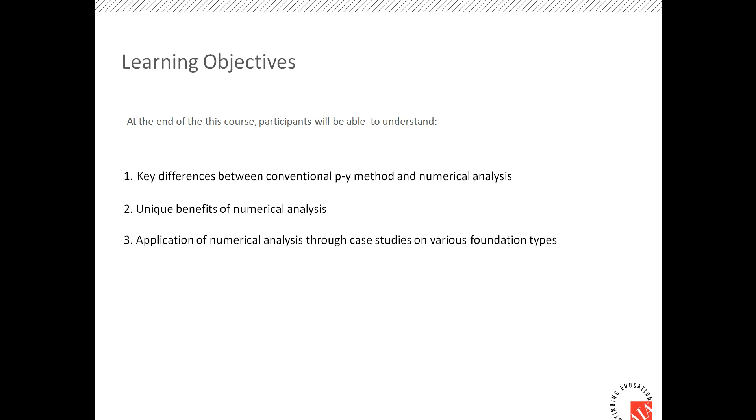Then the unique benefits of numerical analysis, as I alluded to previously, and then the application of numerical analysis through case studies on various foundation types. We actually have a case study submitted to us by one of our clients today from Langen, and we're very excited to share it near the end of this session.

Here's today's table of contents, the outline of the presentation. First is the background of foundations in general. Then we'll go over foundation design methods for single as well as group piles, and then pile raft foundations - the three main types of pile foundations you'll be working with. Then numerical analysis for pile foundations, a case study for a tower in Dubai, and last, a couple of numerical modeling demonstrations, one with SoilWorks and one with GTS, to conclude the session.

So first, let's talk about the background of foundations. We'll give you an introduction to pile analysis, the types of foundations or piles that are available, and also the load resistance of deep foundations.

As far as foundations, there are two main types. There's shallow foundations for smaller structures, usually smaller residential structures, warehouses, anything built within a firm foundation with a relatively small superstructure. Then we have deep foundations for high-rise buildings, large structures, or structures built in soils that have a looser or less resilient resisting force.

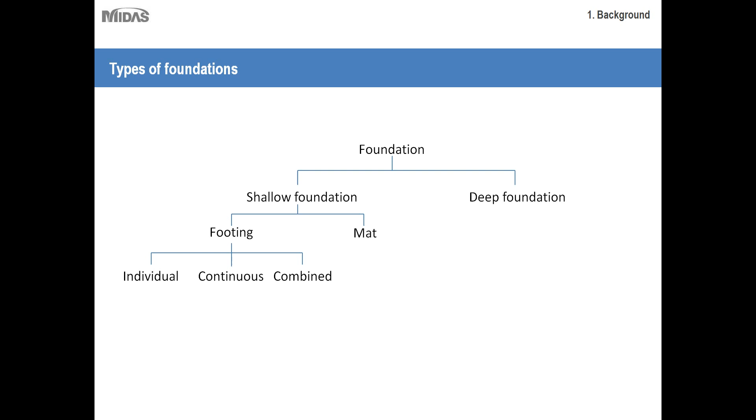Within shallow foundations, we have footing and mat foundations. Just two weeks from now, I'll go more into detail about shallow foundations as well as the different design methodologies used for them. These are all things you can look forward to in session 3, going into detail about these different types of shallow foundations.

But today's session will focus on deep foundations. Here we have three types: pile foundations, which will be the focus of today's course, then pier foundations, also known as drilled shafts, and then caissons. So once again, the focus will be deep foundations, and in particular piles, because these are the most commonly used.

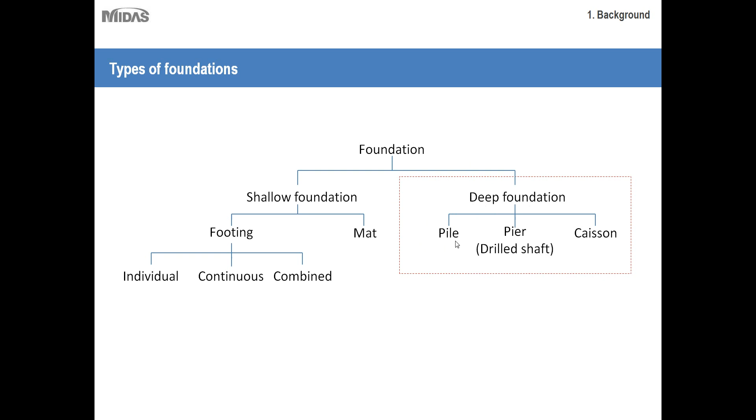As far as an introduction to pile analysis, I want to share a quote from Professor Braja Das, one of the leaders in pile foundation analysis. A quote that's really important to understand when doing pile analysis: although numerous investigations, both theoretical and experimental, have been conducted in the past to predict the behavior and load-bearing capacity of piles, the mechanisms are not yet fully understood and may never be.

Keep in mind that the understanding of pile foundations is always in a state of getting better. There are professors still working on ways to improve upon the methodologies we're currently using. However, the design of pile foundations has many variables to take into account. Structurally speaking, piles are not very complex structures, but their interaction with the soil around them leads to so many uncertainties that behavior is almost always unknown.

Something we discussed previously was how soil behavior is nonlinear, which makes it difficult to predict, and it becomes increasingly difficult to predict for deep pile foundations. Each case can be an independent case, and there are still complexities in interaction that engineers are still looking after, and researchers are still going on with pile analysis and pile foundations.

Something that's really great about these courses is that we'll talk about the latest numerical modeling techniques used by engineers to handle pile foundation analysis. Even though there are still variables that are yet unsolved, numerical analysis in particular helps us do our analysis with much more accuracy and much more confidence than previously.

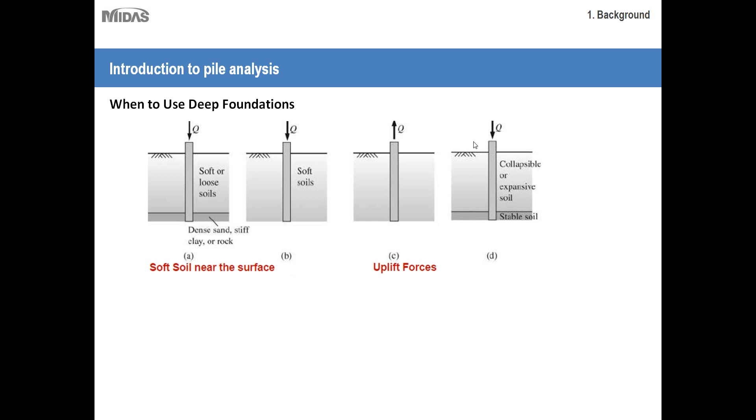Also, if you have large uplift forces, the same goes for collapsible or expansive soil underneath the surface. If there's a significant amount of uplift forces, pile foundations tend to stabilize the structure much more efficiently than a shallow foundation. Whenever soil is particularly weak or expansive, pile foundations can make the structure much more stable than a shallow foundation.

Also, if you have a significant amount of lateral loading, pile foundations are very useful in this respect. The deeper the foundation goes, the more resistance it can provide towards lateral loading, whereas a shallow foundation with significant lateral load would cause the foundation to fail.

Then also, if you have large tilting risks, so loads applied at an angle, such as a combination of lateral loads and axial loads, pile foundations can more readily resist that sort of force.

Then also scour effects. For example, if you have a bridge foundation built in a river, over time you have a certain amount of scour. If the water is going downstream and there's a significant amount of soil buildup upon the foundation, shallow foundations would not be able to resist that effect as efficiently as a pile foundation.

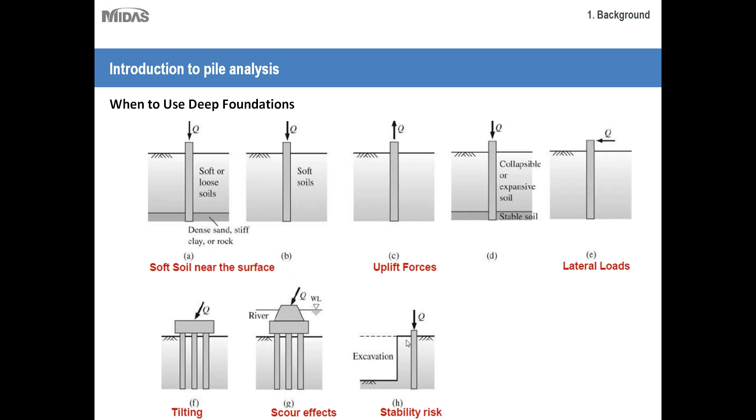And then if you have a stability risk with a foundation near an excavation or a slope and want to secure that—for example, if there's adjacent structures or a neighboring slope—pile foundations provide much more support and safety. A shallow foundation located close to an adjacent structure or excavation is more at risk to fail.

Okay, then also, this is another case I'll be talking about in detail today: particularly heavy load. If you're working on a large structure, say a high-rise building or one that experiences significant loading, maybe a large industrial plant, it typically requires what's called a pile raft foundation.

The pile raft foundation is a combination of a group of piles and a large concrete slab that distributes the weight accordingly. This is particularly useful for larger scale projects, and in particular for numerical modeling, pile raft foundations are done using that method—we'll discuss that in much greater detail later in this presentation.

So these are just the main project types that would warrant a pile foundation to be used and designed. I'm sure as geotech engineers you're already familiar with all of these, but it's a good review for those of you who are new to the field.

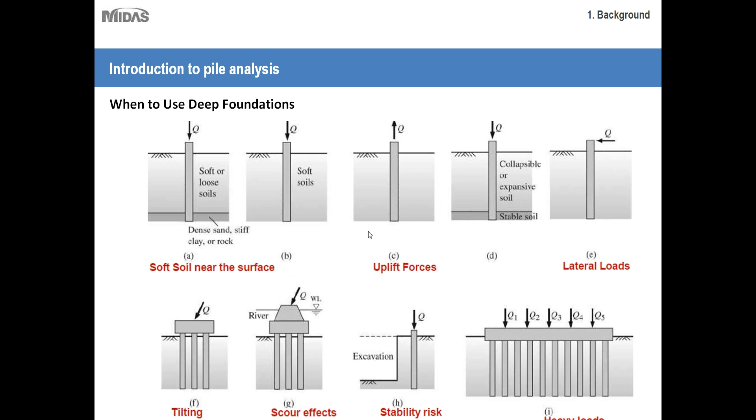Okay, so now let's talk about deep foundations. What are the different types of deep foundations? Based on the material, we have steel piles, concrete piles, as well as timber piles. Concrete piles in particular are the most commonly used at the moment.

Now, methods of installation can vary: we have driven piles, bored piles, and screwed piles. Also, regarding effect of installation, as I mentioned in the terminology, we have displacement, small displacement, and non-displacement piles. These are the classifications of the different types of deep foundation piles. In the interest of time, I won't go into too much detail, but just keep in mind these are the options available to you.

Now let's discuss the load resistance of deep foundations. In order to understand why deep foundations are preferred at the aforementioned conditions, we must understand the load transfer mechanism of the pile.

So the pile can be designed to be a shaft or frictional pile without any bearing resistance, or on the other hand, a fully end-bearing pile, or a combination of forces. It depends mainly on the soil conditions, but also on the pile itself, the size of the pile, the length of the pile, and partly on the load as well.

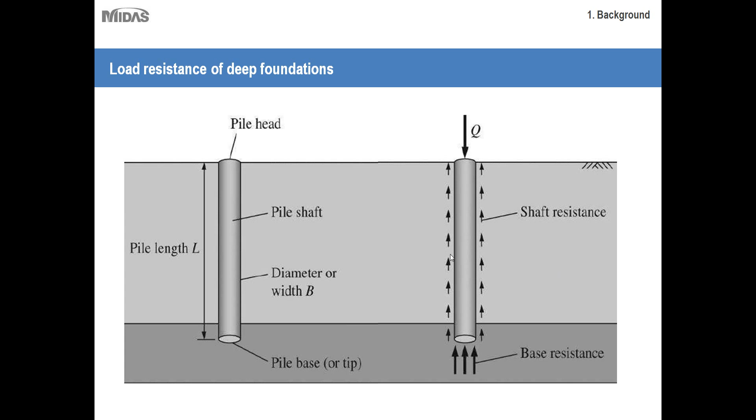So just keep in mind that these two main things are the base resistance as well as the shaft resistance. These are the two main forces that account for the resistance or stability of a particular pile, in addition to obviously your soil conditions.

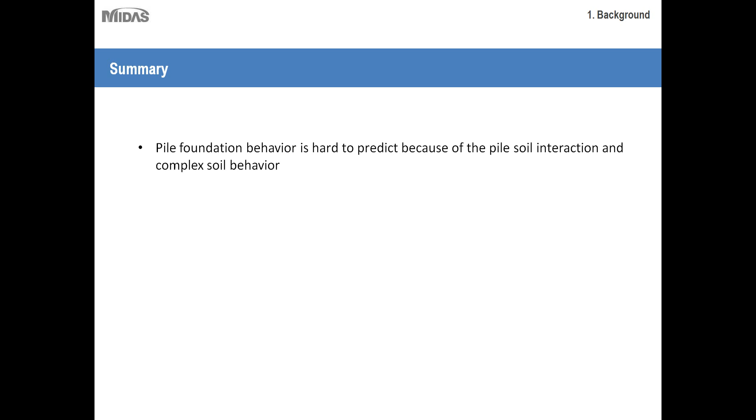Okay, so let's have a brief summary of what we just went over. Pile foundation behavior is hard to predict because of the pile-soil interaction. We'll discuss this in detail, soil structure interaction, how that comes into play, I believe in the next section. This is one of the complexities that makes it difficult to predict pile behavior. In order to really accurately predict it, soil structure interaction needs to be taken into account.

Also, unstable soil strata needs deep foundation to safely carry load to harder or more stable layers. So typically, as far as soil strata is concerned, your soft or weaker soil layers are located near the top, and your stronger, firmer soil layers or weathered rock layers are located near the bottom. So essentially what a pile foundation does is allow you to transmit the forces or weight of your structure past the soft soils and down to the hard soils where it's more resilient or stable. That's one of the key strengths of pile foundations, that you can drill down, or transmit those forces down to a more stable strata.

Okay, so structures exerting loads like high lateral, tilting, or heavy vertical loads, or structures near excavation, are site risks that can compromise stability and require deep foundations. For example, if you have any large-scale loads that include lateral loading or tilting, your pile foundations or deep foundations would be able to resist that much more efficiently and safely than a shallow foundation.

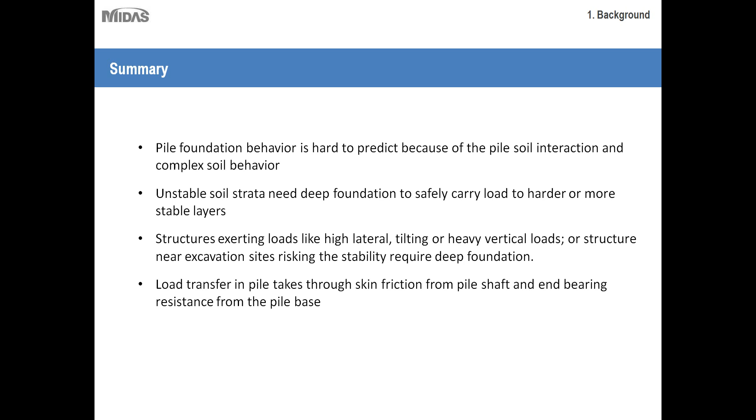So load transfer in the pile takes place through skin friction from the pile shaft and end bearing resistance from the pile base. So those two main factors come into account when you're taking a look at load transfer: through the skin friction and then through the pile tip at the bottom.

Piles could be designed as skin friction, end bearing, or a combination of both, depending upon soil conditions, the method of installation, pile material, and external loads. So several variables need to be taken into account when designing them: skin friction, end bearing capacity, soil conditions, and your method of installation. These are the main points to take into account from this particular section.

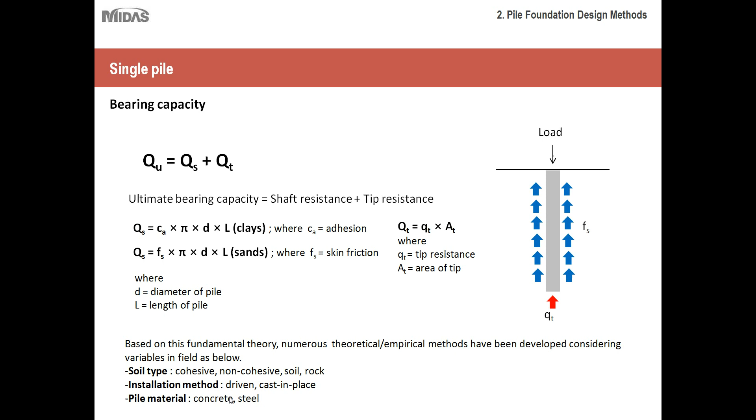Typically concrete is the material of choice. It provides a relatively high shaft resistance, whereas steel, as you can imagine, is much smoother. So the shaft resistance would be significantly less.

Next, we need to determine the settlements that comprise these values. So S sub T, total settlement, equals the elastic settlement plus the shaft settlement plus the tip settlement. When you're doing your analysis or design, make sure that you take into account all three settlement types to determine your total settlement.

The tip settlement is the settlement that occurs at the very base of your pile near the bottom. Shaft settlement is the settlement that occurs on the sides of your pile. The skin friction will resist against the shaft settlement, but there'll still be a certain amount due to shaft settlement. And then also elastic settlement.

Whenever you apply any compression load upon your pile, your pile will compress, and there'll be a certain amount of settlement that results from that as well. A combination of all three settlements equals the total settlement, which is ultimately what you'll be looking for in your final design.

Okay, now let's talk about lateral behavior of the pile. Whenever you have any lateral load being applied to your pile, there's a certain type of analysis you need to do. First, let's discuss Broms' method.

This factor beta is applied to determining the lateral behavior of the pile, and it's based on this equation here. Certain variables include the stiffness of the pile section, the coefficient of horizontal subgrade reaction, and also the width and diameter of the pile.

The coefficient of horizontal subgrade reaction is typically determined through extensive lab testing. So typically you have your soil samples, and your engineers or lab workers do significant amounts of testing in the lab.

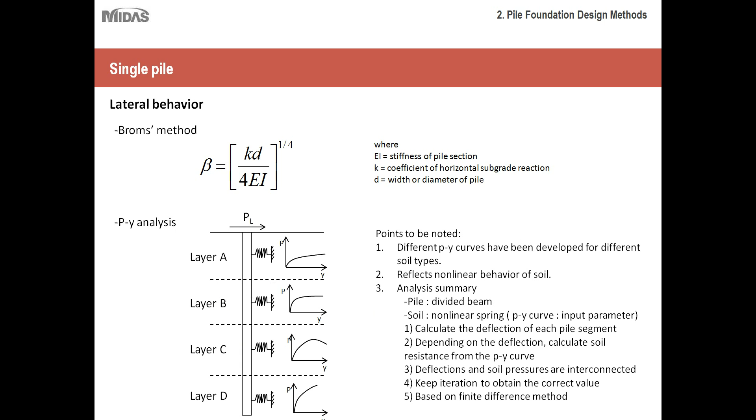And then once again, you have to keep the iterations to obtain the correct values. So PY analysis is an iterative process, but through numerical modeling programs that are out there, it does the iterations for you. So the main things you need to be concerned about are just inputting the proper parameters for your soil layers as well as your pile. And then, as I said, it is based on the finite difference method.

Okay, so let's now compare directly PY analysis versus numerical analysis. First, soil behavior: PY analysis predicts soil behavior primarily through the PY curve, whereas numerical analysis relies more upon constitutive models, such as the Mohr-Coulomb model.

Now, for the pile elements, they're modeled as beams in PY analysis, so they're modeled as just these line elements. Whereas with numerical analysis, you have the option of using solid elements as well as beam elements or line elements. The modeling for PY analysis is a beam plus a nonlinear spring, whereas with numerical analysis, you can create a 2D or 3D structural model.

So for those of you who have experience using both analysis methods, I'm sure you already know that PY analysis is much simpler, much easier to use because there's less variables to take into account. That being said, there are more assumptions being made because PY analysis is more conservative. Whereas with numerical analysis, there are many more variables to be taken into account. The modeling takes longer, but the results are much more accurate because more variables are used in the calculations, and there are less assumptions being made.

Soil structure interaction is based purely, once again, on the PY curve, whereas with numerical analysis, you have interface as well as embedded elements that the program uses. So you define these elements and the program uses what you defined to determine the interface, the way your soil interacts with the pile elements. We'll discuss this in greater detail later on. And then the upper structure, you can partially model it.

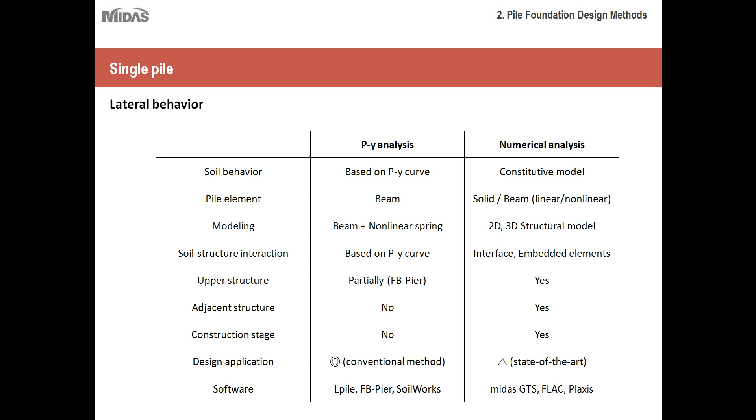As far as the software available in the market nowadays, LPILE, FB-Pier, or SoilWorks all handle PY analysis very well. As far as numerical analysis or finite element modeling, Midas GTS, FLAC, and Plaxis are among the top programs used for those types of projects.

The design itself will involve determining how to optimize the best design for the number of piles, selecting the best organization or configuration of your piles, as well as how many piles are being used - the spacing, the layout within the foundations. Typically you'll have several different layouts that you want to try, and you'll run the analysis for each and see which one works best for your project needs.

As far as the pile cap, it mainly serves to distribute the load coming from the top properly to the different piles and to connect these piles to the superstructure. So that's pretty straightforward. As far as the way your forces will be distributed, they'll be pressed upon the pile cap, the pile cap will distribute them to the piles, and the piles will transfer the loads to the soil.

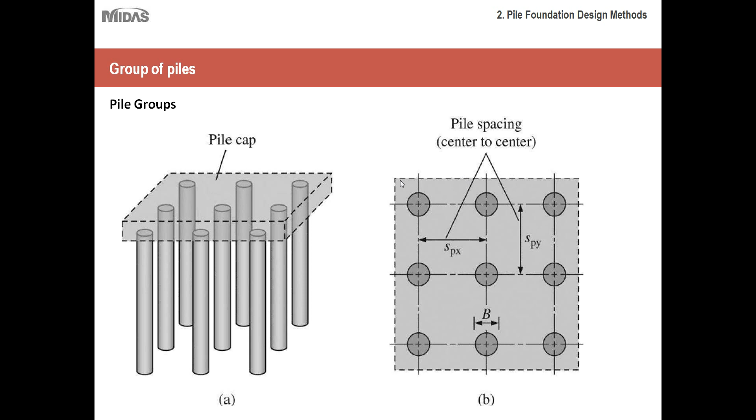I'm sure you've all seen this overhead view before. Your center to center spacing of your piles is outlined as such.

Some important concepts to remember when you're designing pile groups: the ultimate capacity of piles may not be equal to the number of piles multiplied by the capacity of a single pile. So you can't just do the analysis for one pile and then multiply it by how many other piles you put in the group and get your total capacity. It doesn't really work that simply.

Also, the ratio of the pile group capacity to the total load capacity of the piles acting as single piles is called the group efficiency factor. This is another important thing to keep in mind when designing a group pile. The group efficiency factor is dependent on the number of pile rows and the number of piles per row, spacing, and the diameter of the piles in the group - so it depends on how your piles are spaced, as well as the size of the piles themselves.

Okay, so now let's discuss pile raft foundations, which, as I stated previously, are for larger scale structures or larger scale projects. Pile raft foundations provide an economical foundation option for circumstances where the performance of the raft alone does not satisfy the design requirements. Under these situations, the addition of a limited number of piles may improve the ultimate load capacity, the settlement and differential settlement performance, and the required thickness of the raft.

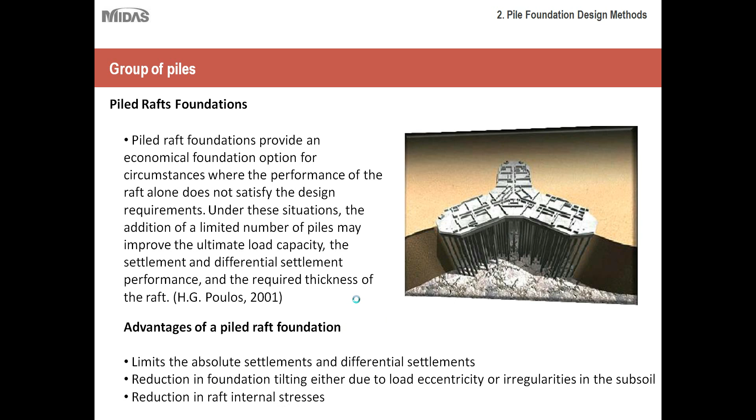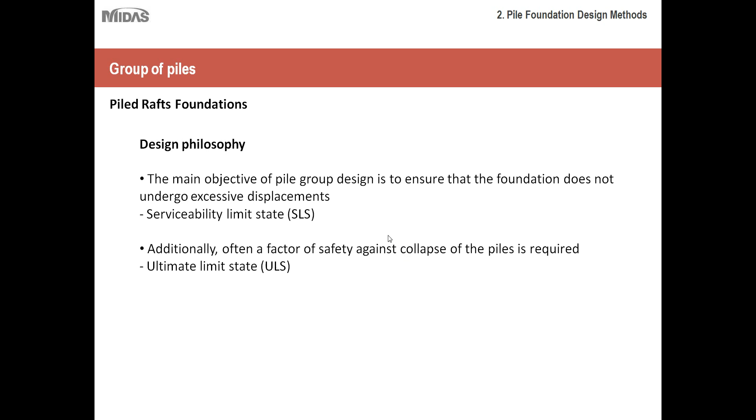Let's talk more about pile raft foundations, and in particular, the design philosophy behind them. The main objective of pile group design is to ensure the foundation doesn't undergo excessive displacements, also known as a serviceability limit state. There's a certain limit you don't want to pass as far as displacement. Additionally, often a factor of safety against collapse of a pile is required, also called the ultimate limit state. The real ultimate limit state must be determined by considering the interaction of foundation and superstructure.

For those who've worked or will work with pile raft foundations, you'll need to work closely with structural engineers. It's usually a back and forth: geotechnical engineers provide certain design considerations to the structural team, they run the analysis on their end with specifications they need to meet, and send results back to you. It's an iterative process between structural and geotech engineers to ensure all design goals are met.

Also, the ULS, or ultimate limit state, reverts to a displacement criterion determined by structural considerations. Once again, it's very much a team effort between geotech and structural engineers when pile raft foundations are designed.

Now for the bearing behavior of a pile raft. The behavior of a pile raft foundation is much more complex than single or even group pile foundations. You can do away with the PY curve approach through several iterations for a single pile or group of piles, but I think use of numerical analysis programs like MIDAS-GTS or Plaxis 3D is absolutely necessary. Here's the reason why.

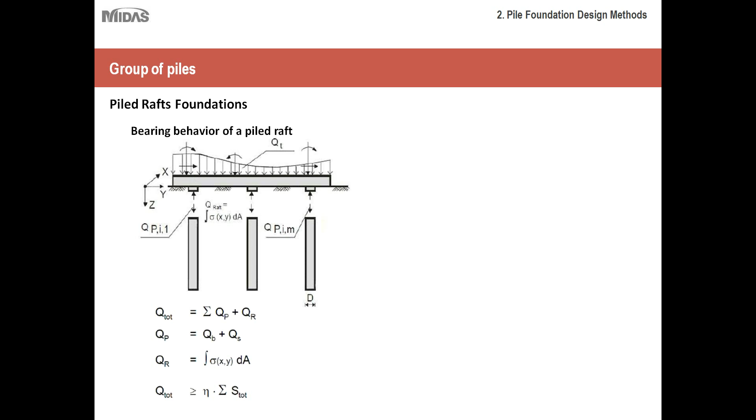These interactions are very critical in governing how the piled raft will behave or perform, and its ultimate bearing capacity at the end. Ultimately, the total bearing capacity of the piled raft will be the summation of the bearing capacity of the piles plus the bearing capacity of the raft.

Even though from the outside it looks very simple as far as how the design or structure works, there are all these variables that need to be taken into account in order to really design an optimized pile raft foundation.

As you can imagine, doing something like this by hand or by spreadsheet would take a very long period of time. It would be a very painstaking process. So that's just another advantage of numerical modeling programs in general.

So you have large-scale projects with these types of variables. Your main focus ultimately will be to design or create a model that simulates all of the input parameters that you have. For example, you need to make sure your soil properties are correct, the dimensions of your pile raft are correct, and that you have a configuration that works as a starting point.

From that point, you can run the analysis. You can see how close it gets to your ultimate bearing capacity or the limits that you set, and then you can go back and make adjustments to the design. So it's an iterative process with the structural engineers.

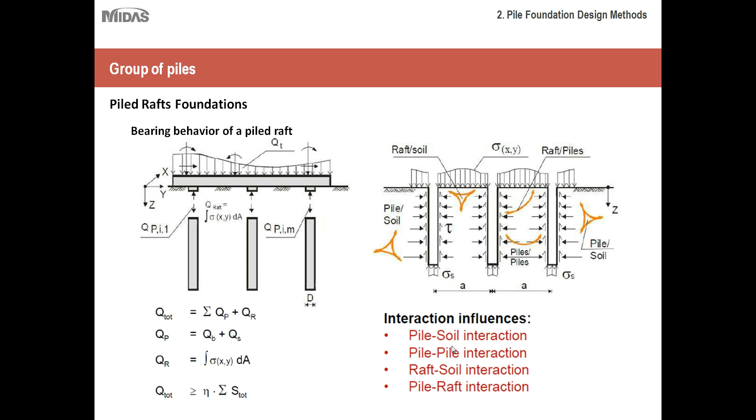But keep in mind that when you run the analysis on any numerical modeling program, these interactions are all being taken into account. That's why for a lot of large-scale projects such as pile rafts, the analysis can take quite a long time, maybe up to an hour on even the most high-end programs. That's why the analysis itself takes so long - it's because there are all these interactions that need to be taken into account and computed for.

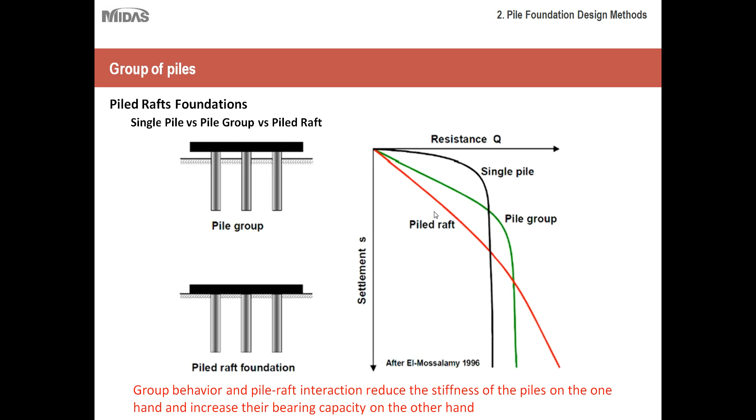Okay, so now let's talk about certain design requirements for the pile raft foundations. SLS, serviceability limit state, is a decisive criterion for the design of vertically loaded pile rafts. Also, the magnitude of absolute and differential settlements and tilting of buildings are therefore of special importance, especially for high-rise buildings.

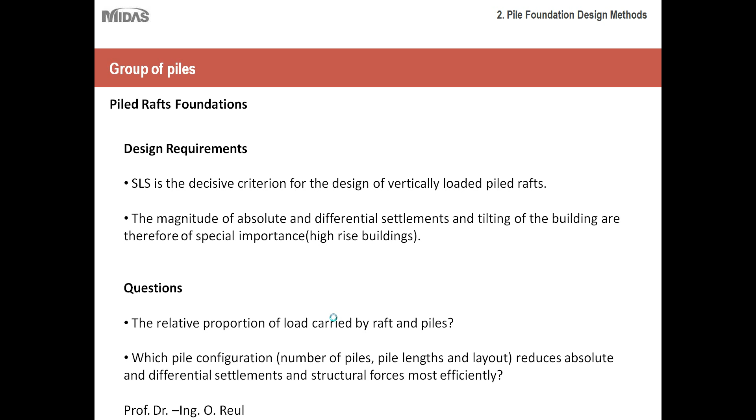And then numerical modeling requirements. For those of you who are or will be working with pile raft foundations, these are things you'll need to take into account whenever you're creating your model. You should keep in mind that the model should be able to consider the three-dimensional behavior of the pile raft foundation. This is key - you can't really model pile raft foundations in 2D.

As we stated previously, the inner and corner piles behave very differently, so in order to accurately capture the behavior of a pile raft foundation, it has to be done in full 3D. Also, you need to simulate the behavior of a single pile to check its reliability and adjust the applied parameters depending on the chosen pile type. That's another iterative process - determining the parameters of your single pile.

Also, the applied constitutive laws should be able to take these things into account: the nonlinear pile-soil behavior at the pile shaft and pile base, as well as the stress-strain behavior of the soil depending upon the applied stress path and strain level. This just goes back to your input parameters - you have to make sure that all of the data you put into the program is reliable and accurate. Naturally you'll have lab tests and field tests at your disposal to make sure these constitutive laws are met.

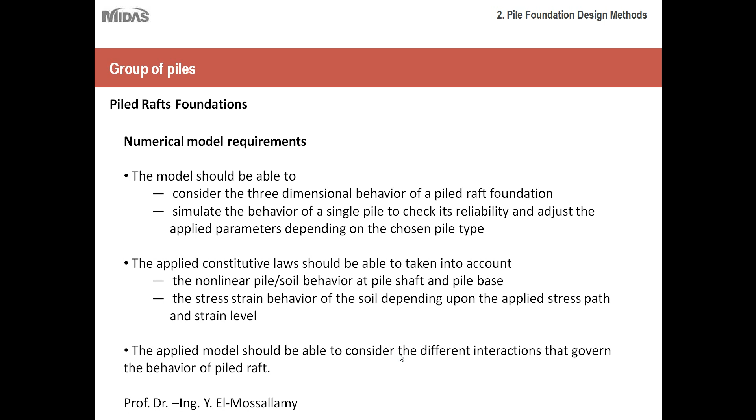And also the applied model should be able to consider the different interactions that govern the behavior of the piled raft. That goes down to modeling interface elements, making sure that all of your parameters accurately represent the behavior of your soil against your piles, as well as the piles against the raft. We'll talk about that in greater detail in the next section, but these are certain variables that are very important when doing your numerical model.

Okay, and then just the design process of pile raft foundation. As we discussed previously, it's a very iterative process. First you have your geotechnical tests, lab tests, field tests to determine the strength and characteristics of your soil. You'll also have pile tests to determine the strength characteristics of your piles. From that point, you'll create a numerical model on a software or geotechnical program. Once you create your model, you'll run the simulation to get your results.

Typically a parametric study - that's just another way of saying multiple case study - you'll have several different cases that you'll model and compare against each other, with different load combinations that you'll want to model. Then it'll go back to the model simulation. So it's this iterative process where you make adjustments to your model based on the results.

If the results that you have aren't optimal, you'll want to go back and change your model and see what your results are again. Once you create your model, there might be some calibration that needs to be done, which goes back to your model simulation, so rerunning the analysis after making changes. Once you're ready, you can submit a foundation design to your structural engineers to review.

As far as foundation design, the serviceability limit state and the ultimate limit state are two criteria that need to be brought to the forefront, which the structural engineers will be looking out for when they do their structural design. The structural engineers, using what you give them, will make certain design choices, but they may need to go back to you and ask you to make adjustments to your model to better fit what they have in mind. That's the second iterative process you're working with, going back and forth with the structural engineer.

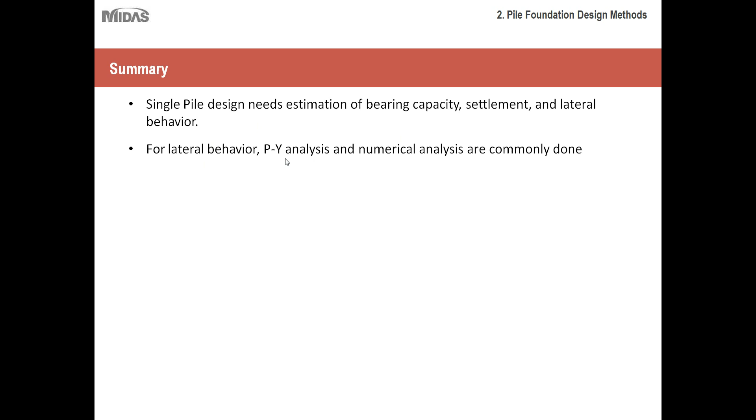Okay, in summary, I know it's a very long section, so let's review what we went over before the quiz. Single pile design needs the estimation of bearing capacity, settlement, and lateral behavior. For lateral behavior, PY analysis and numerical analysis are very commonly done. Numerical analysis has the advantage over PY analysis as it saves iterations and approximation.

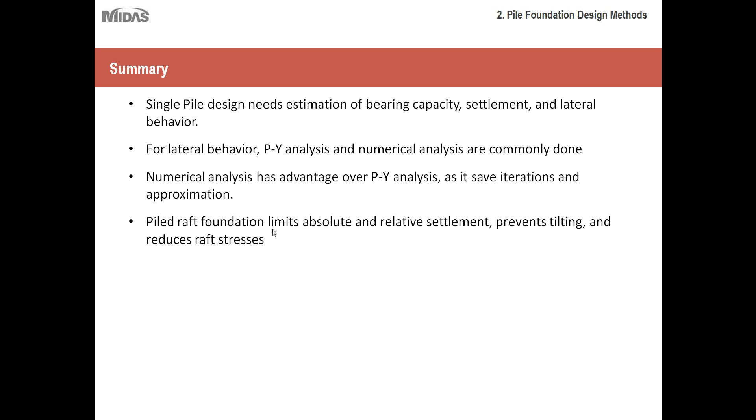Pile raft foundation limits absolute and relative settlement, prevents tilting, and reduces raft stresses. Those are key advantages of pile raft foundations. The pile raft system reduces the pile stiffness and increases the bearing capacity, thus preventing failure.

The governing criteria for the design of a pile raft is settlement, or the serviceability limit state. Pile raft foundation behavior involves pile-to-pile, soil-to-pile, raft-to-soil, and raft-to-pile interaction, making conventional analysis obsolete. There's really no way to approach pile raft foundation design or analysis with conventional methods; it has to be done through a finite element model, through a program. 3D numerical analysis must be done for pile raft foundation.

So these are the main key points to take from this section. I know we went over a lot of material quickly in the interest of time, so don't worry, I'll send everyone a copy of this PowerPoint at the conclusion of the session. Also, the numerical model must be calibrated with field data, and constitutive laws must reflect the interaction. That's pretty straightforward - you have to get your field test first before you create your numerical model.

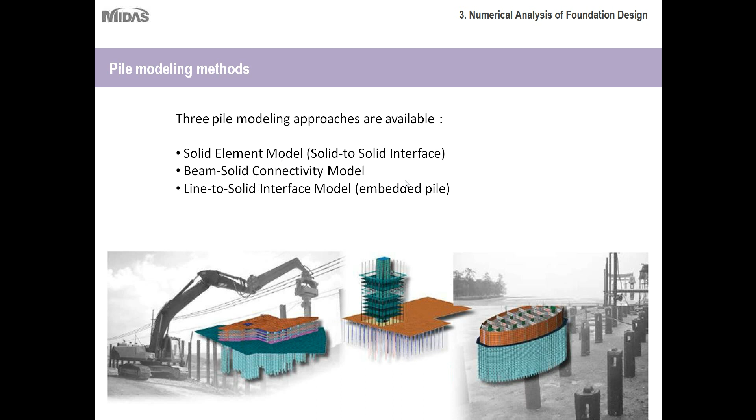Numerical analysis for foundation design. We'll go over different pile modeling methods, how to verify results, and things that need to be considered in numerical analysis. When it comes to numerical analysis or finite element modeling, there are three main approaches available: a solid element model, also known as a solid-to-solid interface; the beam-to-solid connectivity model; and a line-to-solid interface model, also known as the embedded pile. We'll go over each of these modeling types in detail.

First, let's talk about the solid element, or the solid-to-solid interface. Essentially, what you're doing when creating a solid-to-solid interface is you have a complete model that consists of all solid elements. As you can see, this pile consists of solid elements. The engineer has taken his pile, just a single pile, and divided or meshed it into a set of finite elements. He's done the same with the soil, which, when working with finite element analysis, you'll always mesh.

However, meshing your pile is optional. There are certain benefits and weaknesses when you choose to mesh your pile element as well. But keep in mind that in addition to your pile element being meshed, there is also a series of interface elements created along the surface to model your pile-to-soil behavior. So that's the first model, solid-to-solid interface, and the main thing to remember is that what makes it unique as far as modeling is that the pile element has been fully meshed.

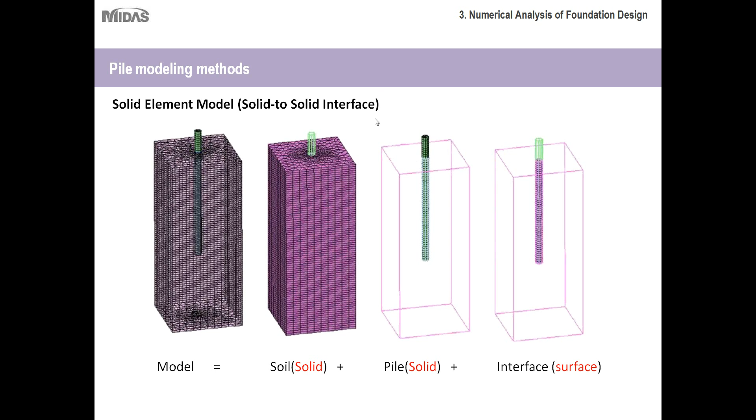So let's take a look at how this affects our analysis. Main points of attention for solid element models: the model definition and mesh generation can be elaborate for a large number of piles.

This is just another way of saying if you have a large-scale model with maybe a dozen piles, or up to 100 piles, then creating a mesh set for each individual pile might be cumbersome, a bit too much. Keep in mind that the more you mesh, or the larger amount of elements in your model, the longer it takes to analyze.

Even if you elect to mesh your piles, you'll get very highly accurate results, but the analysis could take a very long time, especially with a very large set of piles. So many elements in the model contribute to a very long computation time.

Also, pile forces and moments are not directly available in the post-processing. Even though finite element analysis, or creating 3D elements for your pile, is very good for displacements, all the nodes are just connected. Here's your interface element, and all your nodes are interconnected.

You can get very good displacements, but you can't get, for example, shear force, axial moments, axial forces, or moment diagrams for your pile. If that's something you need, keep in mind solid elements can't represent or be used to calculate that. That's one shortcoming of solid elements: you can't get your moment diagrams or axial shear diagrams for your piles.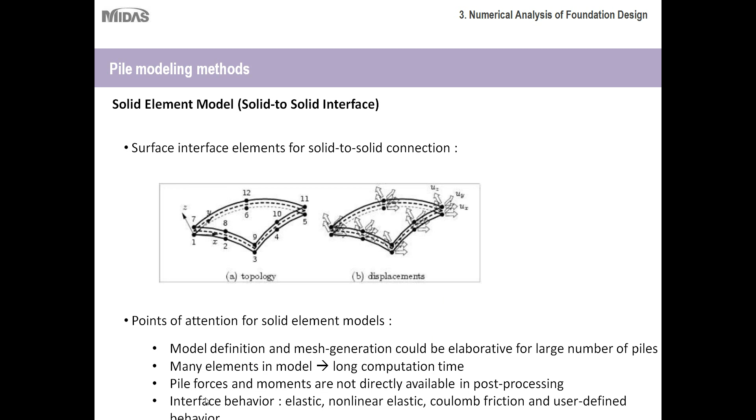Those are three different categories. In other words, when you create your model, you'll input your parameters for your soil and your pile, but then you also have a third category specifically for interface behavior. So it's important not to forget to define that behavior when creating your model.

Okay, so our next modeling type is called the beam solid connectivity model. As you can see, the soil is meshed once again, but this time the pile is represented by a beam element. So when you do this, you're telling the program that this beam element has certain material characteristics, for example a diameter, a length, etc.

But when the analysis is run, the program will model the pile as a beam element, for the sake of simplicity. Since the pile itself is symmetric and the properties are uniform throughout as far as geometry, it's very convenient to model this as a beam element.

Main things to remember: there's no interface elements for a beam to solid connectivity model, it's just a beam to solid connection. What happens here is your nodes are linked directly to your solid elements. As you can see, one of these represents, for example, a solid element, or the neighboring solid element to your pile.

These nodes will overlap, so the nodes will be shared between the solid elements and your beam element. That way, the displacement will be uniform. For example, if the soil shifts x number of inches, the same principle applies to the beam element - it will also shift x number of inches depending on its placement.

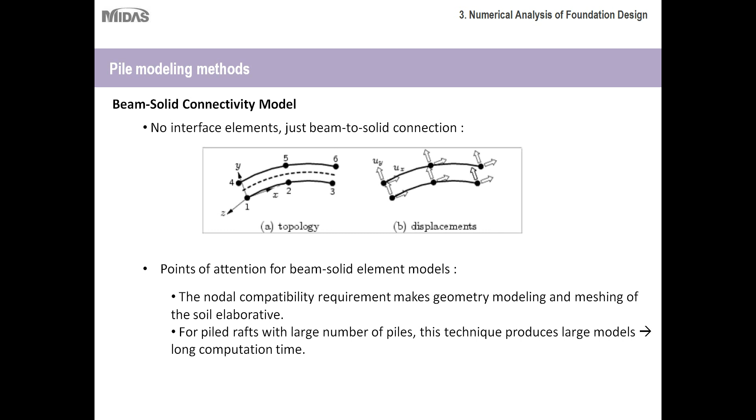So this is typically used for smaller group piles, for example bridge abutments - I've seen this method used a lot for bridge abutments. Whereas for large high-rise buildings or large structures with large pile raft foundations, this method is hardly ever used. In fact, I've never seen it used for a pile raft foundation, just because of the complexities of linking up all the nodes.

So the third model we'll talk about is the line to solid interface model. The main thing to remember is it uses a combination of the solid-to-element approaches of the previous two models to achieve something much more convenient for pile raft foundations in particular.

The pile is modeled with a special element called an embedded pile, represented by these red boxes. It has the property of a beam, allowing extraction of moment and bending forces, which is very key. In the previous beam-to-solid model, you could get axial forces and moment diagrams, but doing the interface was very difficult because of how you had to line up your nodes.

But with the line to solid interface model - I'll discuss it on the next slide - you don't have to line up your nodes at all; it's done automatically. And because part of the pile is modeled as a beam element, you're still able to get moment and shear diagrams. This interface element allows for soil-structure interaction, while the beam element still gives you those diagrams.

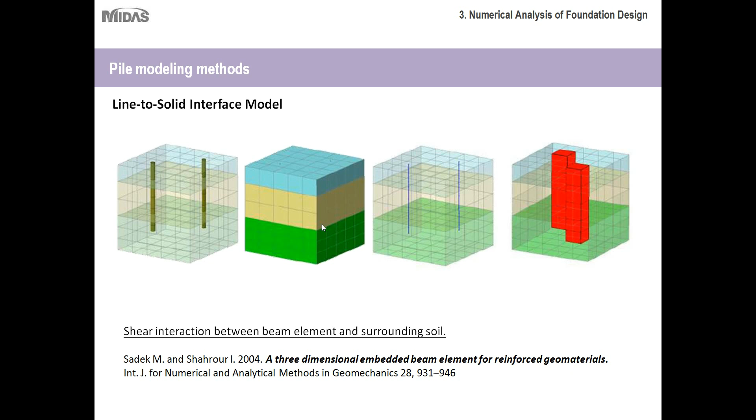So it's really a combination of this beam element plus these interface elements, which makes it a very versatile method to use, especially with pile raft foundations, as far as doing redesigns. Let me go to the next slide to give you a better idea.

So here we have the line to solid interface model, with a couple of characteristics. These square, or hexahedral, elements represent the solid elements of your soil, and these line elements, the beam elements, represent your pile. As you can see, you can directly embed the pile within these solid elements.

And pile and soil geometry can be specified independently - meaning you don't have to worry about directly interconnecting your pile and soil geometry; you can model them independently. The intersections of line and solid elements are calculated automatically, which is very, very key.

You actually don't have to model the intersections yourself. Just because of the way this method is set up, the program can automatically calculate those intersections. Which is very important, so if you go back and redesign or make changes to your model, you don't have to redo all the meshing or line up all the nodes. Technically they don't really line up, but the intersections are computed automatically for you, so you don't have to worry about those. It's all done for you.

Also, nonlinear friction slip properties for line-solid interface elements. Once again, when doing this model, you have to come prepared with your interface material parameters. The properties are for a line to solid interface, which I'll show you a detail of later on. Mesh refinement requirements for the soil are minimal - you don't even have to have a very highly refined or small mesh. You can get very accurate results with larger mesh sizes.

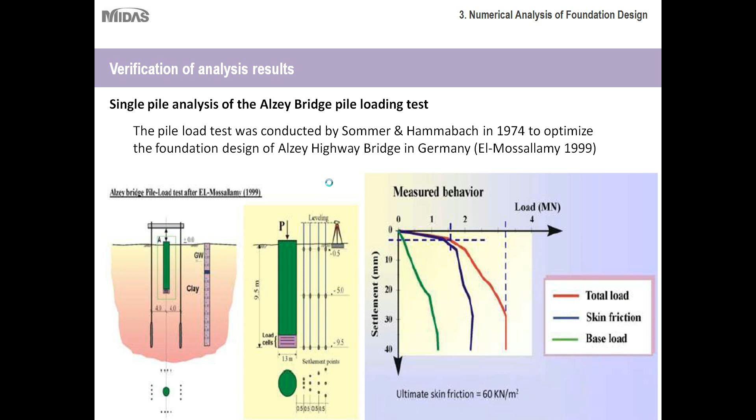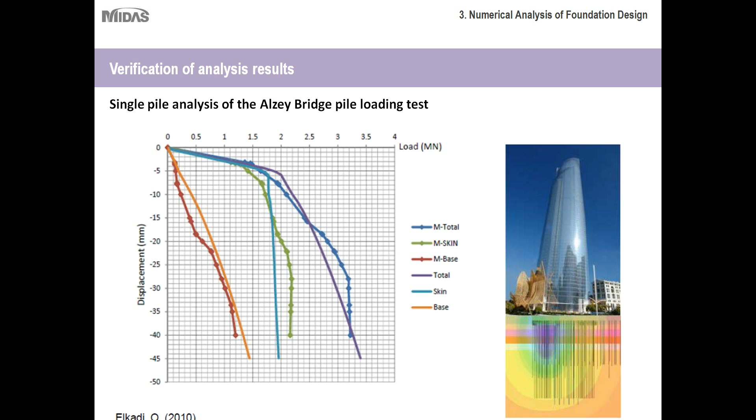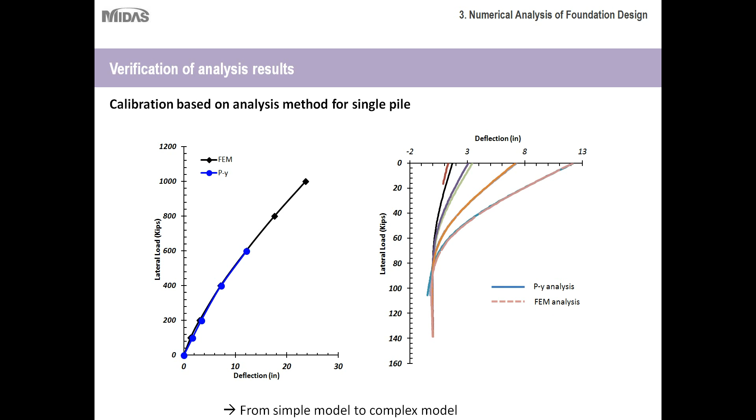Here's another example, from a simple model to a complex model, showing the types of results you need. Here you have your FEM analysis and your P-y analysis - these should be very close. This is deflection versus lateral load. Same with multiple piles - you'll have all your graphs superimposed against each other, and you want these to be as close as possible. If there's a significant differential between your results, you need to go back and check your work, because there's probably some error or variable that needs to be changed or was left out.

So, the main things to consider in numerical analysis - these are the questions everyone needs to ask themselves. What is the most important behavior in a model? Behavior of single piles, group piles, axial or lateral, adjacent structures or superstructures, soil-structure interaction. Depending on what's most important determines which numerical modeling method you'd use. For a single or group pile, you could use solid-to-solid or solid-to-line elements, whereas for a larger scale pile raft foundation, you'd use the last method I showed you with the soil structure interaction elements.

And then accuracy versus efficiency. For more complex geometry, it obviously requires more time. There's a greater investment, especially when dealing with asymmetrical geometry—it takes time to model that in 3D. Efficient modeling will reduce analysis time, so use proper elements, symmetric arrays, and parametric models.

It's really important that a large portion of your time be spent making sure you have an efficient model. If you don't have an efficient model, the time it takes to run the analysis and finish the project will be compounded by a very large degree. So typically the way to avoid that is to invest a good deal of time creating a very efficient model and checking everything.

Because if you try to speed through your model the first time around, it could ultimately lead to a lot of problems in the future, which would lead to you taking more time to go back and change the model, etc.

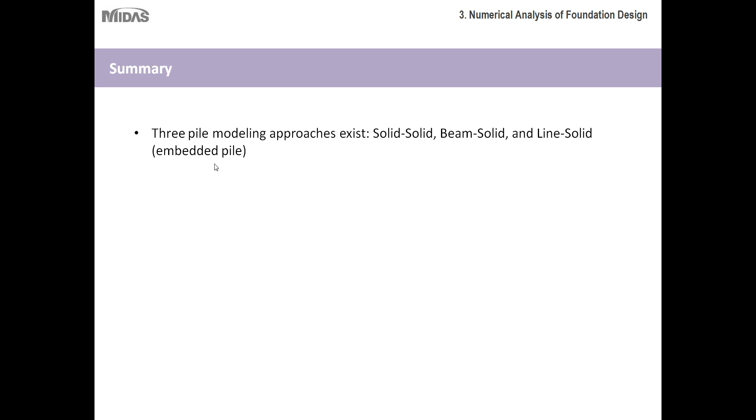Okay, so just a summary of this chapter. Three modeling approaches exist. Solid to solid is typically used for a single pile or small group piles. Beam to solid is used typically for bridge abutments or small group piles. And the line to solid, or embedded pile, is typically used for pile raft foundations. The embedded pile approach has a beam element to represent the pile member, and a friction tip bearing interface element to represent the pile to soil interaction.

So that's very important to remember—the beam element is used to get your bending diagrams and moment diagrams, and the bearing interface elements are used to represent your soil structure interaction. So it's very unique in that aspect.

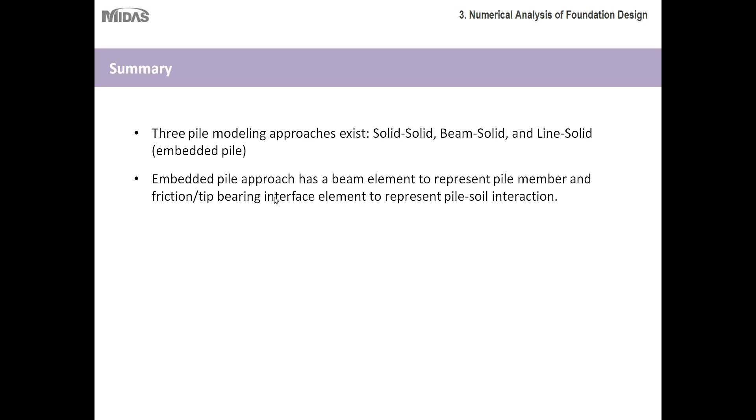Advantages of using the embedded pile element: pile and soil geometries and mesh can be generated independently, so it's very easy to go back and make changes, and easy to create your initial model. The intersection of line and solid elements are calculated automatically—with the beam to solid element, you have to do that manually, which is okay for smaller scale projects, but for a really large scale project it's very time consuming. So that's one of the key advantages of the embedded pile or line solid model.

Nonlinear friction slip properties can be accounted for through interface elements very easily. As long as you have interface properties you can rely upon and are sure about, you can just input them into the program and that'll be taken care of for you. And thus the models are lighter, more efficient, and take less time to run. So that's another key advantage of the line to solid model.

The numerical model must be verified with field test data of a single pile prior to generation of a complete group or pile raft model. So going back to your field test, you'll always have to compare them to your numerical modeling results just to make sure you're on the right track.

The selection of modeling approaches depends, once again, upon the objectives of your analysis. Solid to solid goes from smaller to larger scale—for very small scale projects, you can use a solid to solid model without any trouble. For intermediate projects, the beam to solid model is best used. And for larger scale projects, the line to solid or embedded pile model is most efficiently used.

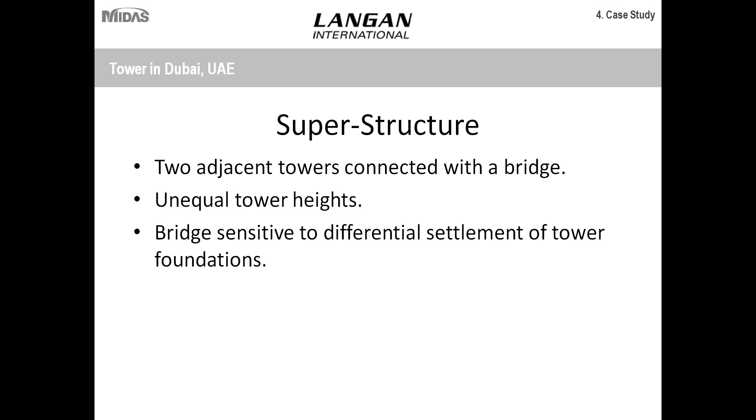The pile raft foundation consisted of about 164 piles per tower, and the pile raft itself was about 3 meters thick. So it's a very large-scale project, a very large-scale foundation.

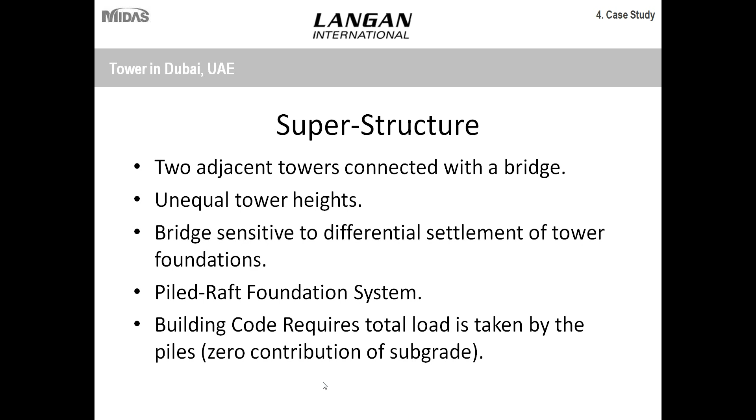As I discussed, it was a pile raft foundation system. The building code required the total load to be taken by the piles, so zero could be contributed by the subgrade. That was a unique design consideration that needed to be taken into account.

So let's discuss the geotechnical investigation that was involved. First, geotechnical borings had to be done, obviously in situ testing, SPT, pressure meter tests, etc. Laboratory tests were extensive, so index properties, triaxial testing, 1D consolidation. All of the materials were tested extensively, in the lab and on site prior to the design, which is to be expected for a project of this scope.

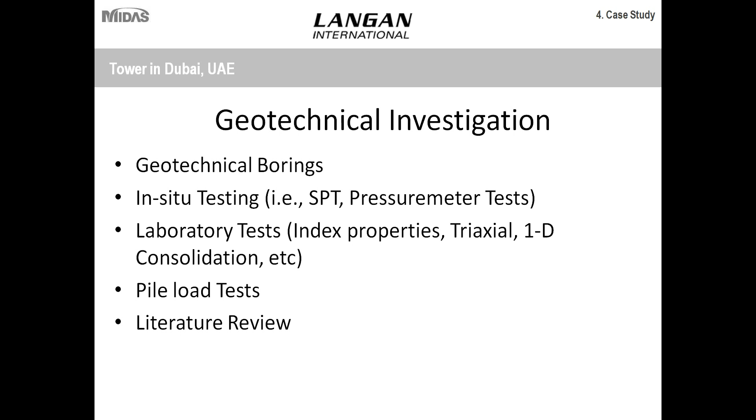Pile load tests were done to check the structural properties of the piles they were using. Then literature review: they made sure to review all of the preliminary design criteria that was given to them, to make sure that everything they were designing, or the pile foundation they were designing, met all the criteria necessary for this particular site and project, ensuring they met all the client's needs.

And then model parameter selection. They needed to determine critical parameters such as the raft thickness, the pile raft thickness, location, as well as the geometry of the pile. This is something that could take a very long time to do, determining the pile configuration, in order to find the configuration best suitable towards the project needs in terms of being economical, as well as safe for the project and designing a very firm foundation.

Soil modulus of deformation is another key factor. The soil needed to be tested to make sure they could design with confidence that the soil has this sort of strength or these characteristics. That way the piles can be designed accordingly to take advantage of the soil's firmness, or to overcome the soil's weakness, depending on the strata they're working with.

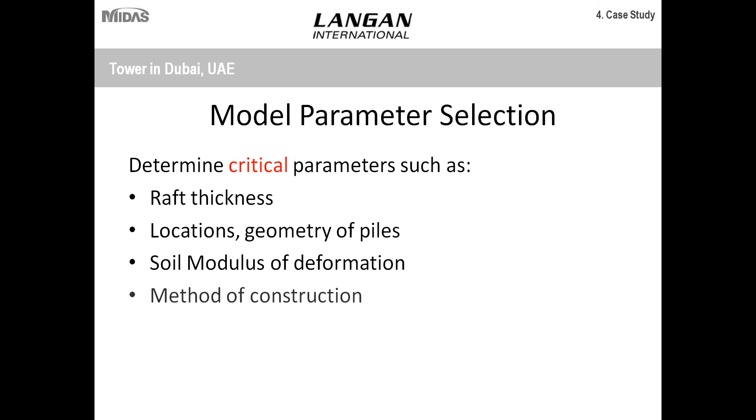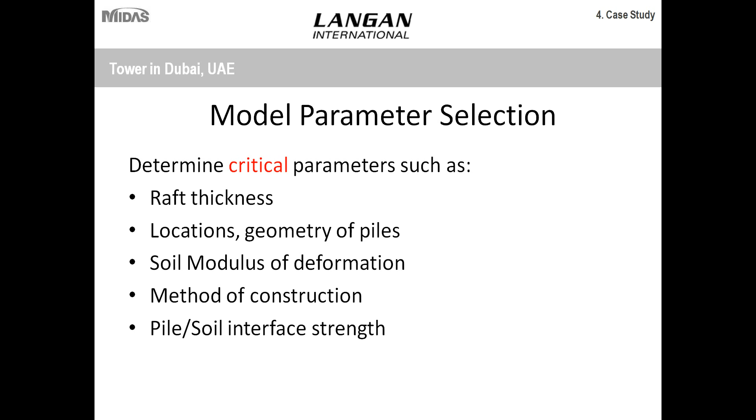And then the method of construction: the way the piles were constructed, step by step, how that would be taken into account for the design as well. And then the pile to soil interface strength—another key factor is determining the characteristics of your soil structure interaction elements.

So now let's discuss the parameters that need to be taken into account for their finite element modeling. The input: the geometry of the raft, the piles, and the stratigraphy. They needed to make sure they had all of their geometry ready, as well as their location geometry available, before they started doing their finite element modeling.

Material properties for the raft, piles, and stratigraphy. There was a great deal of data collecting and investigation before the actual modeling and design work began. Element selection as far as volume, area, and line elements—we'll go over the type of modeling they did in the next couple of slides.

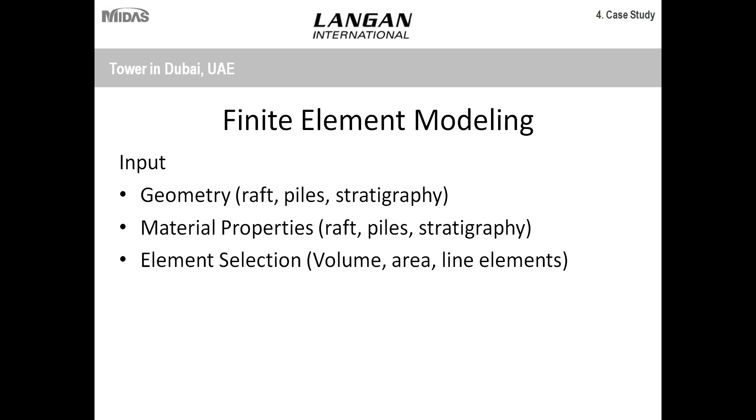Boundary conditions, obviously those are very important. Loading—there are many different load combinations that need to be taken into account, such as construction staging loading, overburden, self-weight, as well as the tower loads. And as we specified, one tower was taller than the other, so there was an asymmetrical load that needed to be accounted for as well.

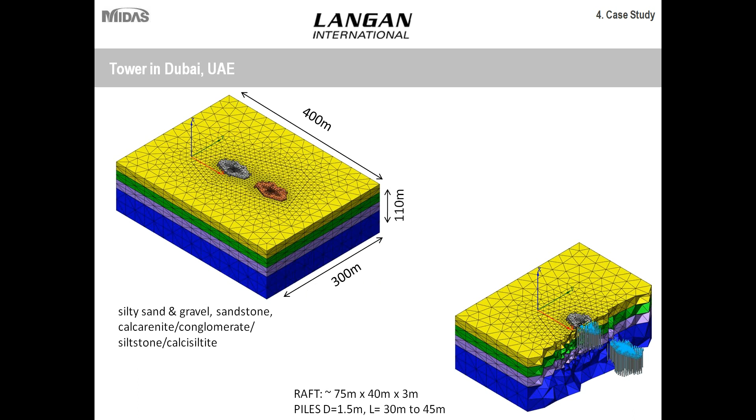So this is a far away screenshot, but we'll get some closer result screenshots in a couple of slides here. So let's talk about the typical rock and soil constitutive models that were used.

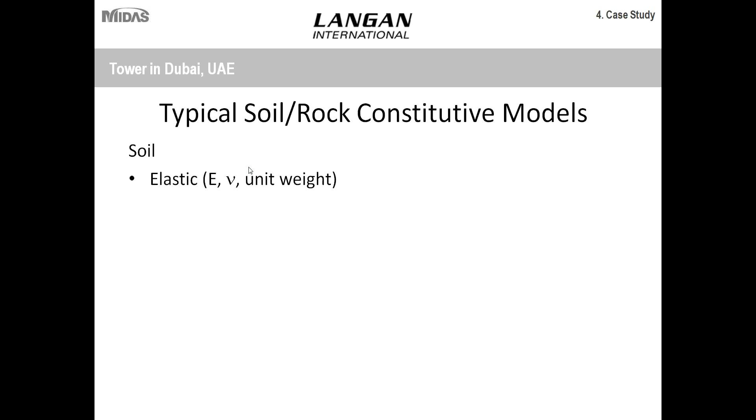So for soil, the elastic properties were determined, so the modulus of elasticity, Poisson's ratio, and unit weight. Then for the Mohr-Coulomb material property, the friction angle as well as the cohesion was determined. One thing I want to point out is the Mohr-Coulomb model is typically used for limit state analysis, in other words, for bearing capacity, slope stability analysis, as well as wall stability. So within your finite element modeling, you have these different constitutive models available to you, each used for its own specific purposes.

And then the modified Mohr-Coulomb, also known as the soil hardening model, is used for pile and retaining wall deflections, as well as supported deep excavations and consolidation. Something one of the attendees of last week's session brought up to me was the difference between the Mohr-Coulomb and the modified Mohr-Coulomb model, also known as the soil hardening model.

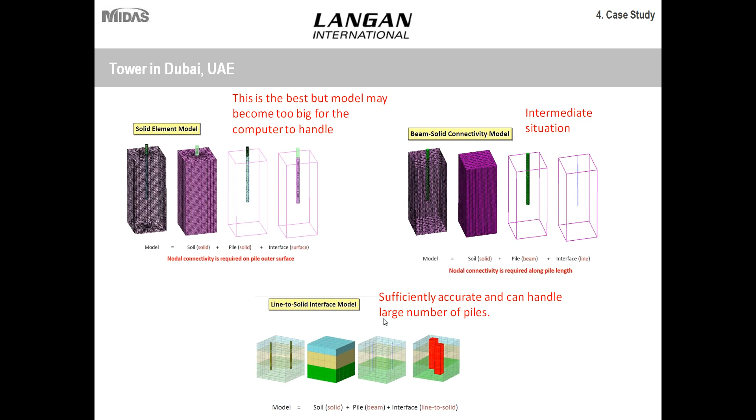It's very easy to make revisions. So ultimately, this was the type of model they chose for their pile raft foundation design, the line-to-solid interface model. Now let's talk about the loading conditions.

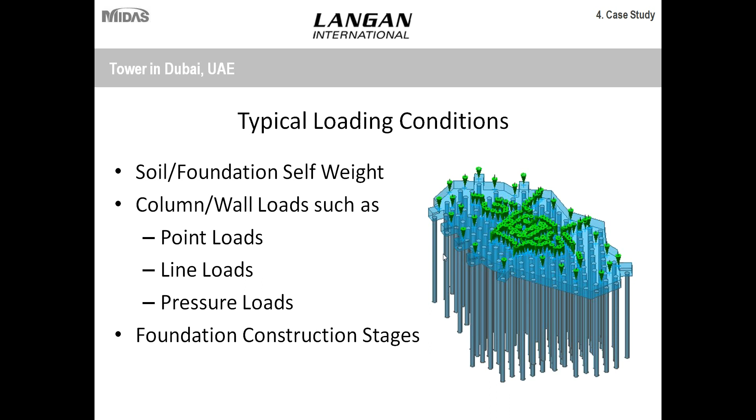Also, the foundation construction stages. When the foundation was constructed, it was done piece by piece, section by section, and the loads changed as well. So that was something they took into account. They modeled a stage for each combination of loads, just to ensure the site would be safe during construction.

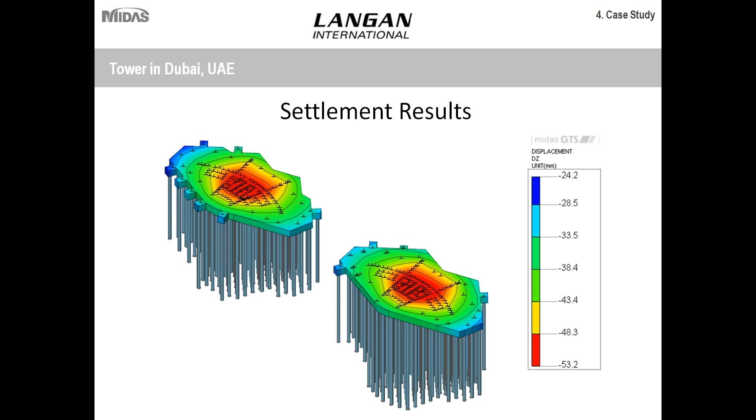This is the final design, so this is what they wanted. They wanted to make sure the ultimate or long-term settlement would be equal for both sections of the building, accounting also for wind load differences and lateral loading. The bottom line is they wanted settlement to be relatively equal for both towers, which they accomplished in the final design. The simulation showed long-term settlement would be equal for both towers, ensuring that years from now the structure would still be level, even after extended periods of settlement.

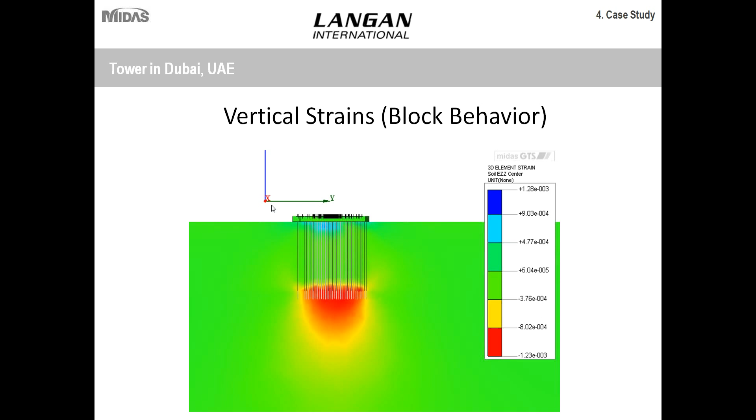Also vertical strains, also known as block behavior. In order to analyze the strain acting on the tips of all the piles, as well as soil strains, they were able to determine this using that option on the results menu.

So that they could say with confidence the settlement would be equal, and that the towers or overall structure would remain level after long-term settlement. That was another way they could check their settlement to make sure the loading, or the settlement anyway, was equal. So even though the loading is unequal, the settlement is relatively equal, which is very key for this design.

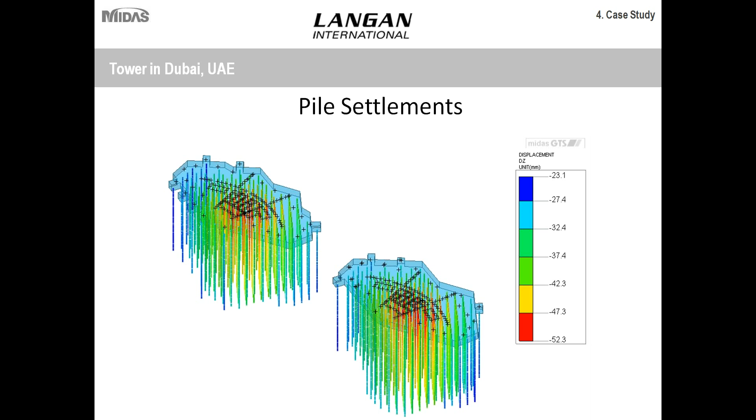For conventional approaches, you'd have to model and analyze each of them individually, which would take extremely long to do. But because they had finite element modeling at their disposal, Costas was able to take care of all the modeling and check all the loading. So if you have someone in your firm adept at finite element modeling, such as Costas or Alan, you'll be able to really speed up and do your analysis much more efficiently.

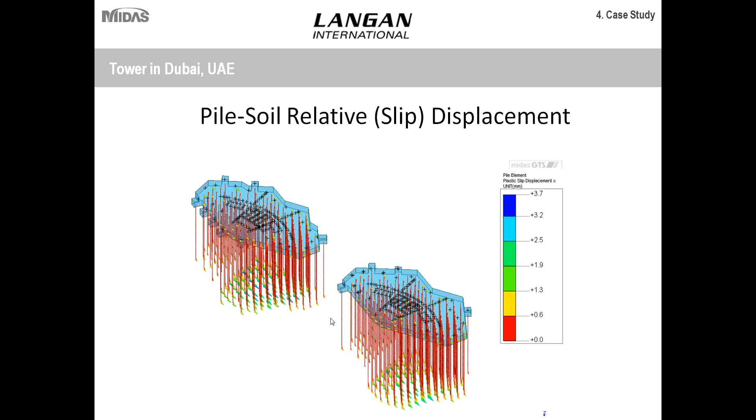Pile to soil relative slip displacement. I'm just going through the different results available to you. When you have a large-scale project such as this, you'll want a wide range of results, since the client will want to make sure everything's been accounted for. With a program such as midas GTS, you can get all of these results and display them very clearly. Your relative slip displacement, at a glance, is relatively similar for each of the pile foundations here.

As you can see, it's a very highly detailed model. All the loads were individually inputted for each of these piles. Settlements were individually calculated—well, technically the analysis was done all at once, but you get individual results for each of your pile head settlements. Because you have this level of analysis, you can get results that are very detailed and that you can have confidence in, to make sure that your pile raft foundation is up to par

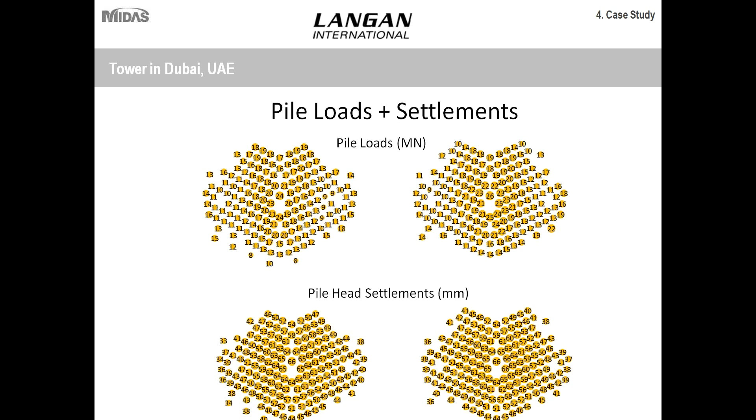with the client's needs. And then also the soil springs. They had to provide soil springs to the structural engineers so that they could model the superstructure with a flexible base. That goes back to what we were discussing previously. I understand the engineers who worked on this worked very closely with the structural engineers. There was a back and forth in designing the foundation—they'd submit their results to the structural engineers, and based on what they received, they would create a design for the superstructure, but then certain design changes or criteria needed to be altered to get closer to what they wanted. So there was a very open line of communication.

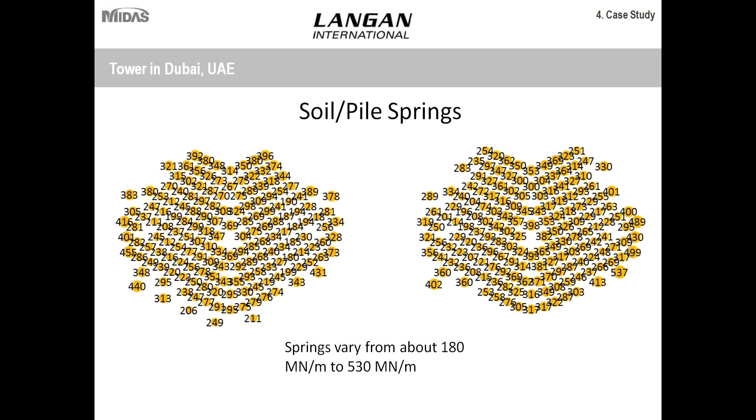If you have a relationship with structural engineers where you need to submit certain results to them, programs such as GTS can help you achieve very easy to read results. As far as spring adjustments, based on the structural engineers' input or feedback, they were able to predict settlements for the pile loads and get all the results to match—settlements, pile loads, wall loads from the structural engineers. So they had to rerun the foundation model and adjust the pile springs appropriately. I'm not sure how many times they had to rerun the model, but I'm sure it was enough to ensure that the results from the structural engineers and the geotech engineers were in line and that everybody was on the same page.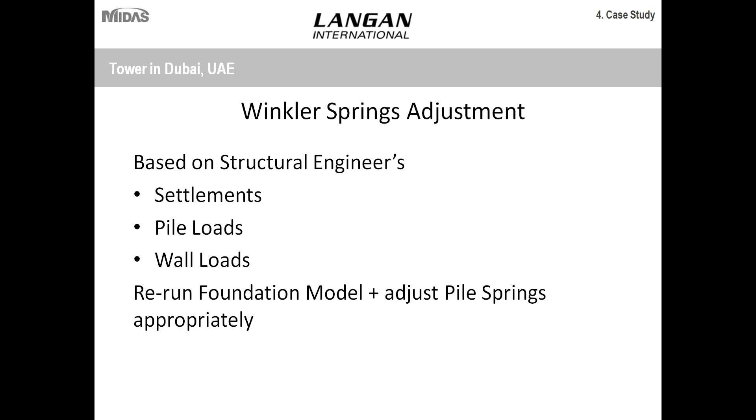If you have someone very adept with finite element modeling, especially someone who can use the program, you'll be able to work at a very high level in terms of working with structural engineers, meeting project goals, and getting your project within a range that's both economical and reliable. It takes some time to learn, but there are many great advantages to having someone adept at finite element modeling within your company.

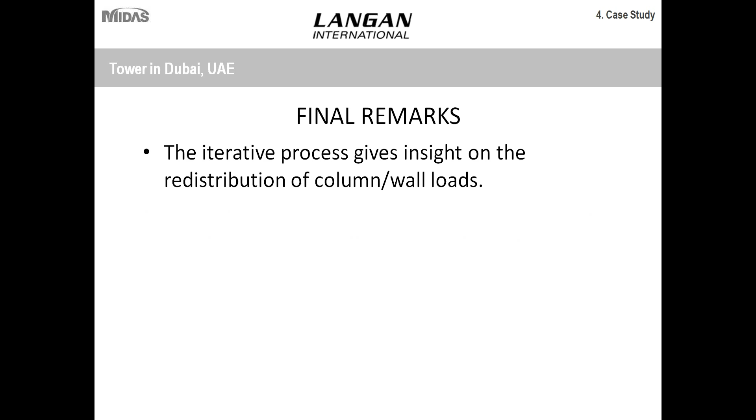So, final remarks for this project. The iterative process gives insight on the redistribution of column and wall loads. Naturally, when the structural engineers have certain design changes or criteria that need to be met, they'll come back to you, and you'll be able to iteratively fine-tune your design to ensure it reaches the engineer or the architect's vision. The redistribution is more pronounced when the superstructure is stiff compared to the foundation.

This is something Kostas could discuss in more detail, but if you have a superstructure that's very stiff compared to the foundation - we discussed previously how the piled raft foundation is sort of flexible. So the stiffer your superstructure is, the more it affects how flexible your foundation is. I won't go into too much detail now, but later when creating your finite element model with your structural engineer, you'll see there's a direct relationship between the stiffness of the superstructure and the redistribution of your wall loads.

The redistribution may necessitate stiffening of the foundation. So depending on the criteria or project scope, you may need to stiffen your foundation - that all goes back to the specific project. When doing the design, it's an iterative process, which is why using that particular model with the beam and interface element is so key, because iterative redesigns become much easier with something like that.

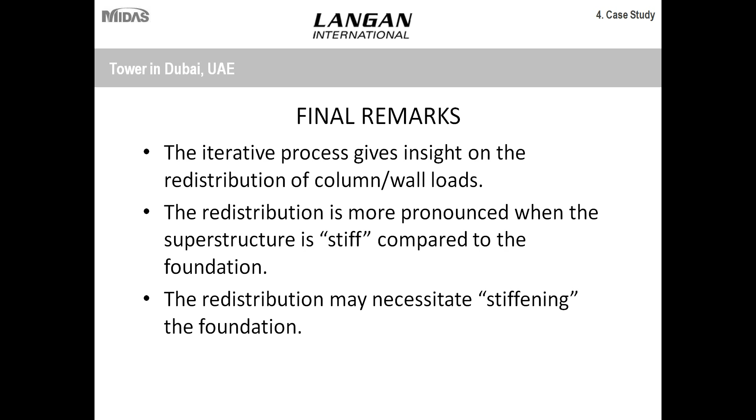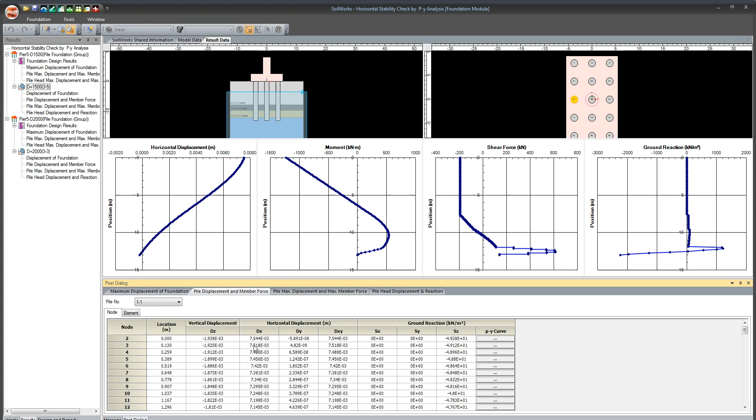As far as the analysis itself, it's fairly simple. For this particular project, I have two foundation types, a 3x5 and a 3x3. If I go to the analysis, or the results section, here's what the results look like - my horizontal displacement, moment, shear force, and ground reactions for each individual pile. There's also another way to look at them - as you can see, I have a PY curve for each section here.

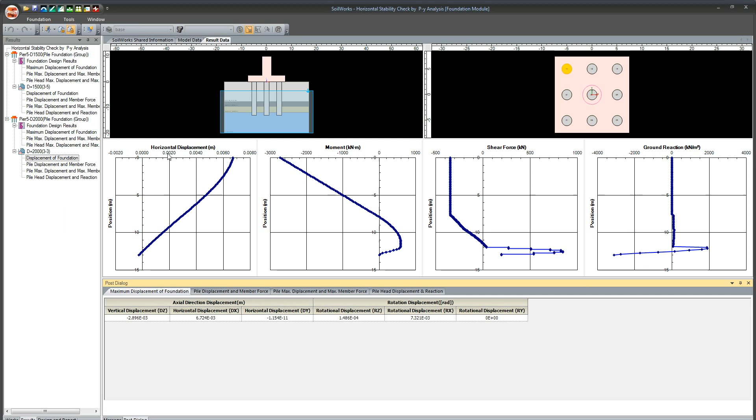I can check directly how each pile foundation compares to the other, comparing maximum displacements, moments, etc. So creating a numerical model is fairly simple and straightforward, and this is typically used for smaller scale projects. For those interested in a numerical modeling program specifically for conventional or PY analysis, feel free to contact me about SoilWorks - I know a few of you are already looking into it. I'm just scratching the surface of PY analysis here, but we can discuss it further individually. I wanted to give everyone an introduction to SoilWorks and how we handle PY analysis.

Last, I'll share briefly a 3D model done in GTS NX, somewhat similar to Kostas' project but on a much smaller scale. Here we have our finite element model for an embankment with a pile foundation. Let me skip to the results - actually, let me show you the properties that were used here.

Because we were doing this in a numerical model, the material properties are much more in depth - we're using the Mohr-Coulomb model. Here we have some properties we saw previously, but also properties for nonlinear behavior, and specific interface elements to model the soil-structure interaction. If you pull it up, there are two main properties: the ultimate shear force and the shear stiffness modulus.

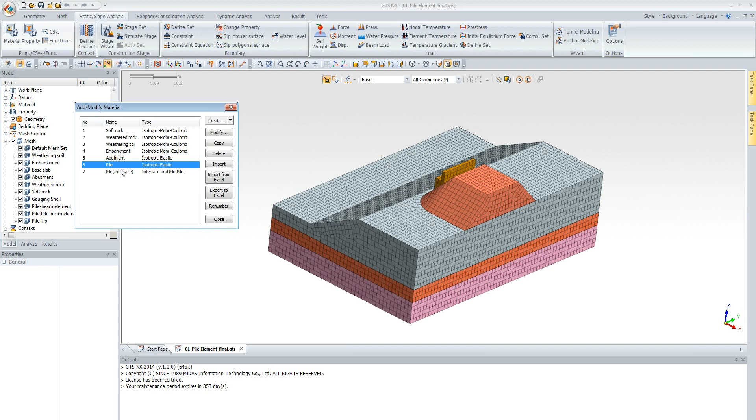But these are all things that need to be modeled individually. As you can see, there's pile elements, or pile properties, and then there's the interface properties. What I'll do is fast forward to the results here and help you take a look at the construction staging.

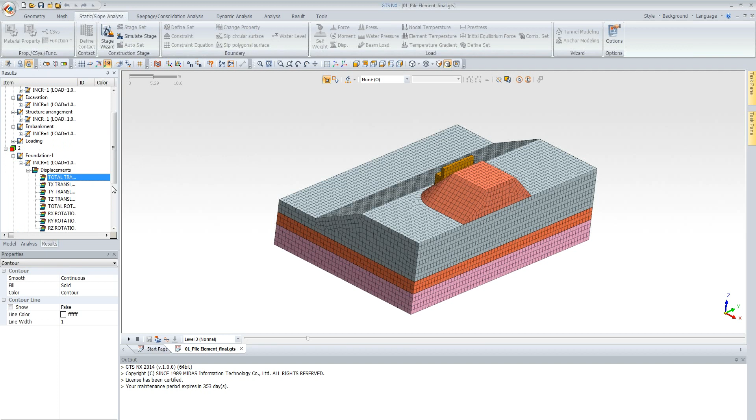The construction staging consists of 5 different stages. First we start off with our initial conditions. Let's take a look at the displacements. As you can see, at the very beginning there's no displacement, it's all 0. This is what our project looks like.

In the second construction stage here, total translation, as you can see, there's a certain amount of uplift when the excavation takes place. Let me put this in the undeformed shape. So here's our first stage of excavation, and there's some uplift when we do it.

Then in the next stage, under structural arrangement, here we have our displacements again. Now we're inputting a structure here. So what happens is there's going to be an excavation, then a concrete block will be installed, and finally piles will be installed as well.

As you can see, you can get all the forces or results that I alluded to previously with Kostas' project, with the Langan project here. But let's fast forward to our piles, because that's most important to us. So here we have our last portion for loading, or external loading, our final stage.

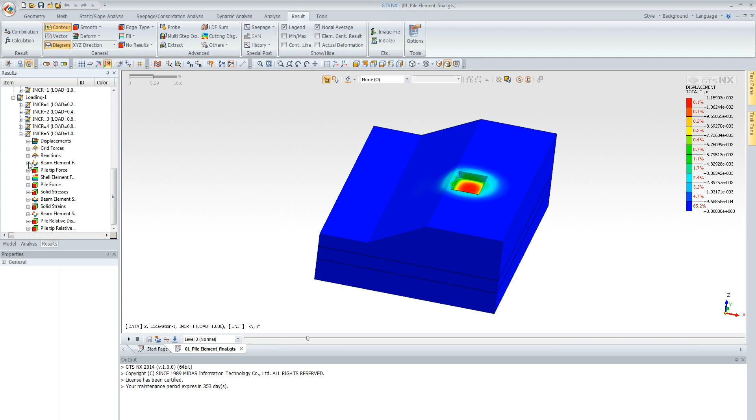Let's go to pile forces here, or excuse me, beam element forces. And then what we want to do is turn off all the meshing except for our piles.

So here are our piles. As you can see, we can zoom in, we can get our axial forces, we can get our shear forces, and we can get our bending moments for each of those individual piles because they've been modeled as line elements.

And then also, if we turn on our base slab element, we can also get results. This isn't a pile raft foundation, this is just a pile cap, but I'd be able to get the results for that as well.

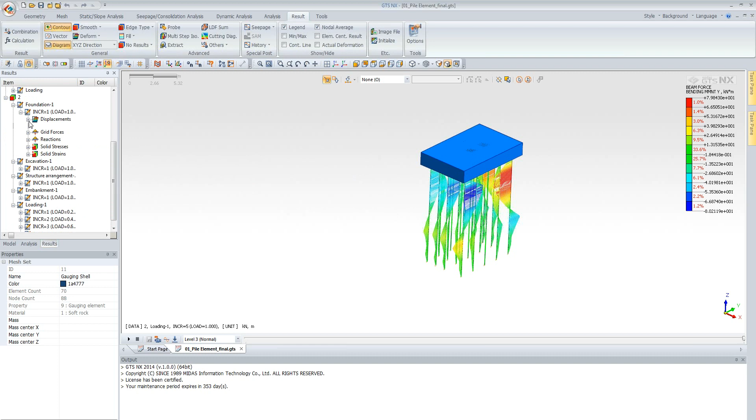So here it doesn't have any sort of translation. If I open up one of my other ones, let's see... As you can see, I can get my displacement for my pile cap.

So this is just a very brief summary or review of a sample project. Since we're low on time, I won't go into too much more detail, but just keep in mind that for larger scale projects or construction stage projects, you typically want to use a higher end program and do the model in 3D, such as this.